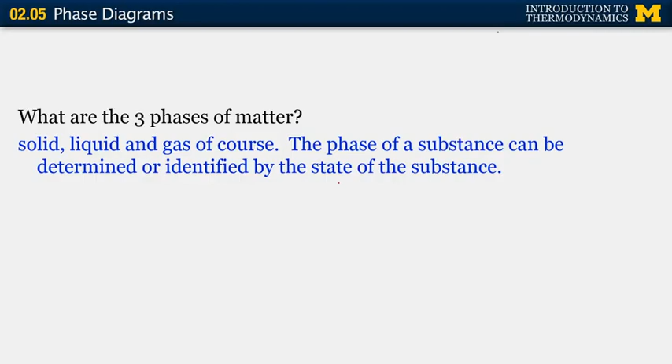Solid, liquid, and gas, of course, are the three phases of matter. What's important for us to realize in this class is that the phase of a substance can be determined or identified uniquely by the state. So if I give you the state conditions, you would be able to go, hey, that's a liquid or a gas. Now, you might think, well, that's kind of intuitive. It's air. When is air not a gas, for example? But it can get trickier, particularly when we start looking at power systems.

And what's important is phase change between liquids and gases, mostly between liquids and gases, not so much between solid and liquids. But that phase change is incredibly important in terms of power generation and in terms of heat transfer. And we'll see that explicitly as we start considering those large power generating systems. So now we're going to have to go through a lot of definitions. And a lot of these I'm sure you're familiar with. Here are a couple that you may not recall or you may not have been introduced to yet.

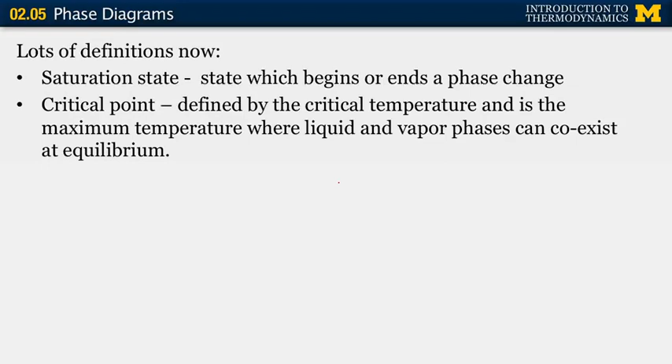The saturation state is a state which begins or ends a phase change. So if I told you you had saturated water, you would know very explicitly, quantitatively, where you were in terms of the state of the water. And again, we'll go through that in the next couple of segments. The critical point is defined by the critical temperature, and it is the maximum temperature where a liquid and vapor can coexist at equilibrium. So again, these are some concepts that may be new to you.

But when a system undergoes phase change, you will have both states present, a liquid and a vapor in the case of evaporation or condensation. Sublimation, you'll have a solid and a gas phase simultaneously present, etc. So those are some of the other definitions that I'm sure you're familiar with. But evaporation, condensation, sublimation, we need to remember that those have very specific meaning in terms of the phases at the initial and final state of the phase change. And in this class, that's going to point us very specifically in terms of the thermodynamic state of the system.

Okay, having said that, we now want to move on to a discussion of phase diagrams. We talked about last time that we're only going to consider simple compressible substances. So again, those are substances that can only undergo expansion and compression types of work. In reality, what that really means is we're talking about simple substances, meaning not mixtures, in systems that are considered pure. So there's one species present. So that'd be like only water.

And air, although you're probably thinking, hey, air actually consists of a lot of different things simultaneously, nitrogen, oxygen, carbon dioxide, all sorts of stuff is present in air. It's the one exception that we have actually a mixture, but we treat it like it's one substance, a simple substance. And we'll see when we start looking at air properties that we actually have properties that are defined to treat air as a simple, pure substance.

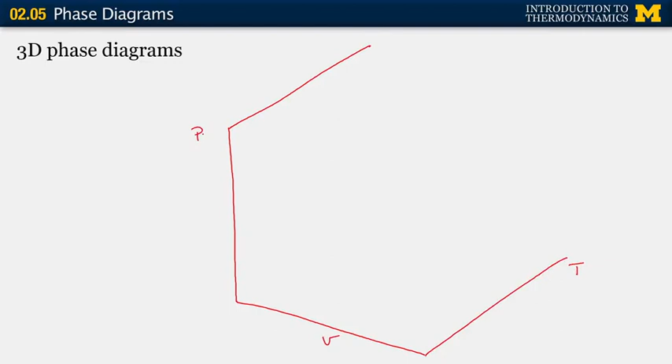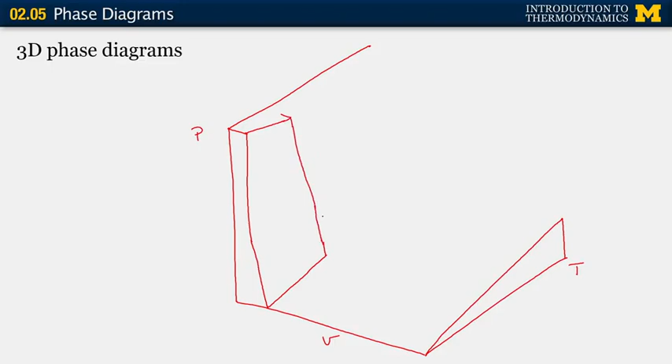And we're going to show you what the relationship is between the pressure, the volume, and the temperature for all three phases of our substance here. And I'm not going to identify the substance just yet. I'll get back to you on that. I'm going to tell you that it's fairly generic. Okay, so as we get this sketch all drawn out for you here.

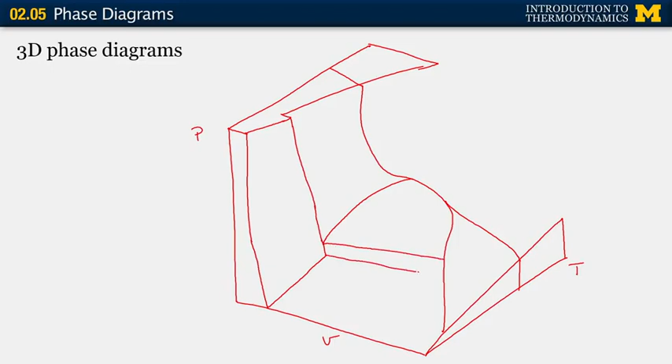Okay, so now we have something to work with. This region, where we have very low specific volumes, or if you prefer, very high densities and very low temperatures and nominally high pressures, is the region of solid phase for our substance. If we increase the temperature, so let's walk along this axis here, we know that we'll transition from a solid to a liquid. So this is the region of liquid phase, and then as we keep moving to even higher temperatures, we should transition to the gas phase region.

This region here on the PV diagram is the solid vapor region. Remember this is the gas phase here. I'm sorry, I'm using gas phase and vapor interchangeably. We know we have to transition from the solid to the gas phase, and in this region we have both solid and vapor phases present simultaneously. So here, where we're bridging between the liquid and the gas phases, we know that we have liquid and gases present. So liquid and vapor region, if you prefer.

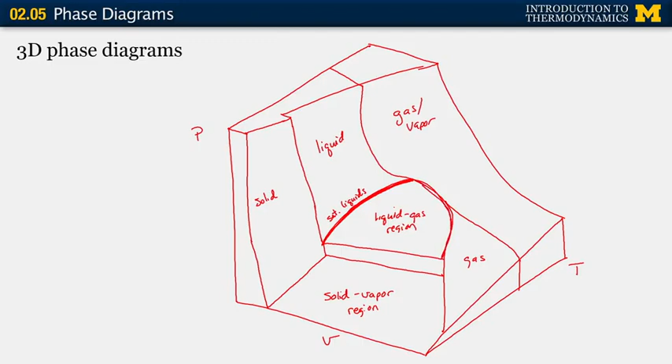Okay. These lines are very important and very specific. These are the lines that I just referred to before, which define the saturation point. So this line is the line of saturated liquids. Okay? And on this side, we have the line of saturated vapor. Okay? And they meet here at the apex of this curve, which is the critical point.

Okay, remember we define the critical point as a point above which we no longer have a distinct transition between the liquid phase and the vapor phase of the mixture. The critical point is uniquely defined for each substance. So, critical point. Once you know the critical point, in terms of the temperature, it uniquely defines everything else, the pressure, the specific volume, all the other properties associated with the system.

This region here, this liquid gas region, is often referred to as the vapor dome or the saturation region. So this is the vapor dome. And you can see how it gets that name because it's got a dome-like shape to it here, or if you prefer, the saturation region.

This figure that I've shown you here is a generic figure that could be used to describe any substance as long as it is a substance that contracts upon freezing. And you can tell that because of that little knee in the solid liquid interface. So if instead of having the curve or the state diagram move to the left here, it instead moved to the right, you would have a substance that actually expands upon freezing. Okay, so that's how you can tell. Getting a little bit into the detail there.

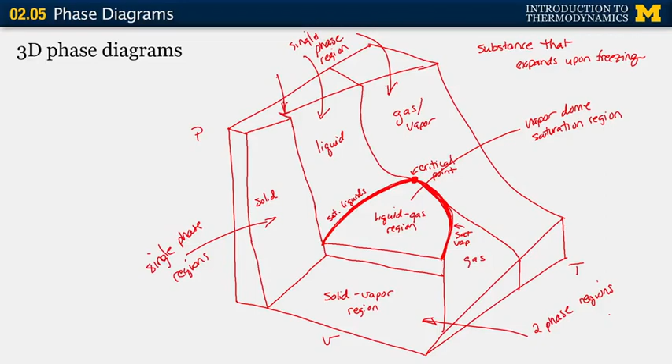Okay. And what's really important for us to understand is, remember we had our rule for how you define a state uniquely. We said you need two independent, intensive thermodynamic properties to fully define a state. The key here is the word independent. In the two-phase regions, pressure and temperature are not independent. Okay. That's really, really important. Within the two-phase regions, we cannot use pressure and temperature to uniquely define the state conditions.

And pressure and temperature are the variables we most like to use because, well, you should ask yourself, why do we most like to use pressure and temperature to define a system? I'll tell you. It's because they're the easiest to measure, and they're very tactile. We understand high temperatures and low temperatures. We get a very visceral response to that. We understand if we have a high temperature system, we know temperatures very well quantitatively.

Is a 100 degrees Celsius fluid a high temperature? Is that something that's going to burn? Is it safe? Does it have a lot of energy? We have a good understanding of that. Same with pressure. We can measure it very well and very accurately. Okay, so pressure and temperature are go-to variables for defining a state. Unfortunately, they are not independent once we go into the saturation region, into the vapor dome. And under those conditions, we're going to have to invoke other thermodynamic properties in order to uniquely define the system.

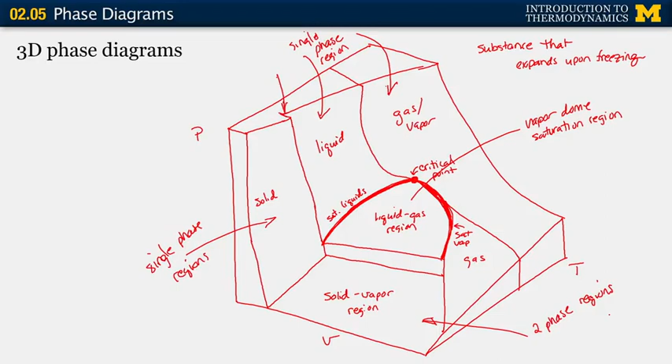Okay, so this is my clever 3D rendering of a phase diagram. In reality, they're kind of hard to work with. So what we've been looking at is a projection, or a cut, if you will, of the PV diagram. That's what we've been using for our past couple of examples. So imagine if you took a slice through this on the PV axis, and you would say, for a particular temperature, I can define a PV diagram. Or, if you prefer, I can look at a projected two-dimensional rendering of the 3D phase diagram.

Okay, but the 2D renderings are a lot easier for us to understand, and that's what we typically use. But we do need to understand that all of the properties are interrelated, and we want to characterize systems so that we have a lot of information about the state. So no matter where we are, pressure, temperature, density, we know how to quantify the state of the system. Okay, so let's talk about 2D phase diagrams, because that's what we're mostly going to use. And we'll just take a couple of examples here.

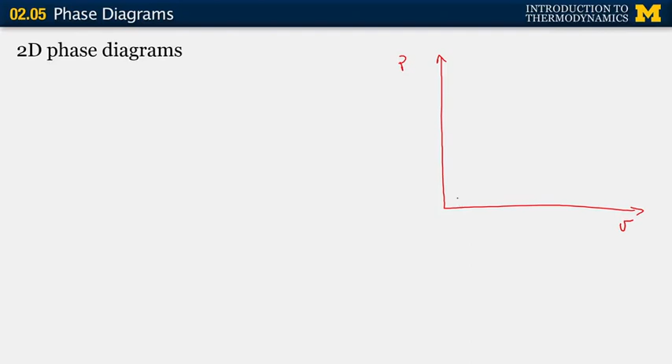We don't want to get too tied up in this, because we'll keep introducing phase diagrams as we do our examples. Every moment is a teaching moment. So we'll get plenty of opportunity to practice our phase diagram skills. So let's take a look at the one that we've been using most, the PV diagram. Okay, so if we took that previous three-dimensional image, and we take a slice of it or a 2D projection of it, what we would see is something that looks like this.

Okay, so to orient you, here's my critical point. And this line defines the boundaries of the different phases. Oops, sorry, that's a straight line. In this region, where we have the highest densities and nominally high pressures, we have the solid phase region. Well, I don't have temperature on here yet, so that's a little trickier for us to just look at and intuit. But in this region, we have the vapor phase. In this region, we have solid plus liquid. And then here's my liquid.

And remember, above the critical point, this is important, we essentially have no transition between liquid and vapor. Those are called supercritical fluids. And they're neat because they act neither like a gas nor like a liquid entirely. So they are other. They have some really neat properties, and there's been a lot of work in all sorts of different systems to use those properties of supercritical fluids to enhance the performance of different technologies. So they're a neat and very topical area.

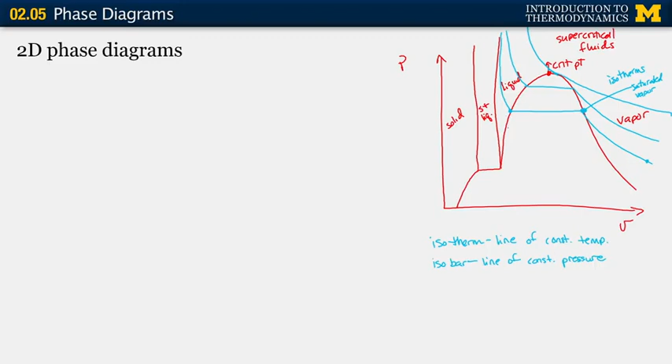Then as we further increase the pressure, what's important for you to see is that while we slide along this isotherm, we pass through this region where, once we fully condense the vapor into a liquid, we then increase the pressure. Okay, the pressure increases in the system. But during that process, where the vapor is condensing, the pressure and the temperature are not independent. They are dependent variables. So that's just like I said before, in the vapor dome, pressure and temperature are dependent.

Okay? So again, as we increase the pressure, we do see the system fully condenses, and then we should pass through the solid and liquid region, again through a phase change, and then into the solid region. Okay, so this is what happens as we slide along that isotherm. You can do the same thought process of, let's say, moving in density space for a constant pressure. You can do the same thought process for a constant volume.

Those are all good things for you to kind of think through, for example, if I said I have a constant density, and as I increase the pressure, what would I see? What would happen to my mixture? Okay. The only other thing that I want to cover on this particular PV diagram is we know that these are lines of isotherms, constant temperature.

So I'm going to just label this one T1 for right now. And I'm going to call this one T2. And we know they're two different temperatures. What I want you to think about, and maybe we can come back to this next time, this will be our closing question for you, is which temperature, I'll call this temperature A, and this is temperature B. Which one of those is higher?

So it's not only important for us to understand what lines of constant temperature look like, but also what direction they are moving in terms of the magnitude. So is TA greater than TB, or is TA less than TB? And then next time what we'll do is we'll answer that question and we'll consider yet another state diagram.